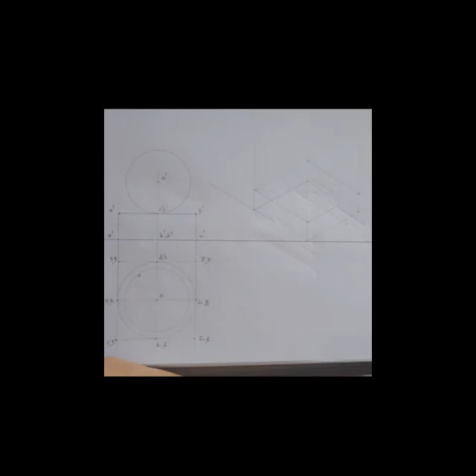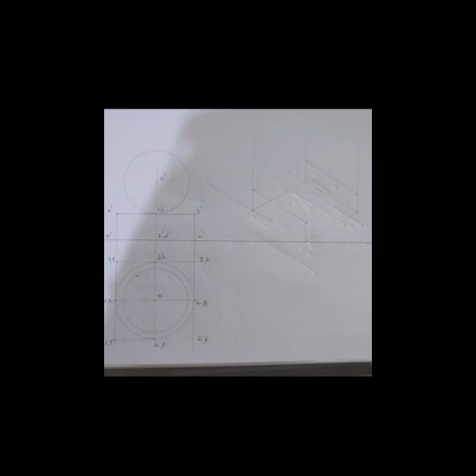Hi, in this session we will consider the second problem. Here we have a sphere of diameter 50 mm, and it is centrally placed over a cylindrical slab of 60 mm diameter and 20 mm height, and here we have to draw the isometric projection. That means we have to take isometric scale.

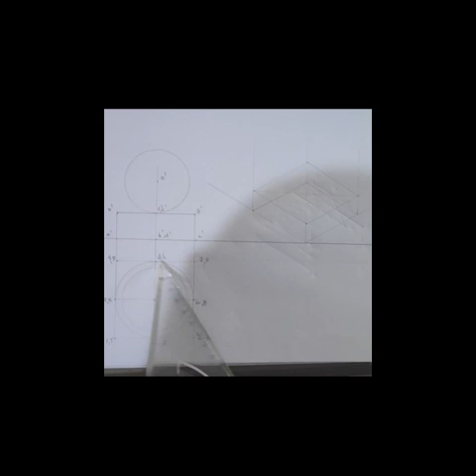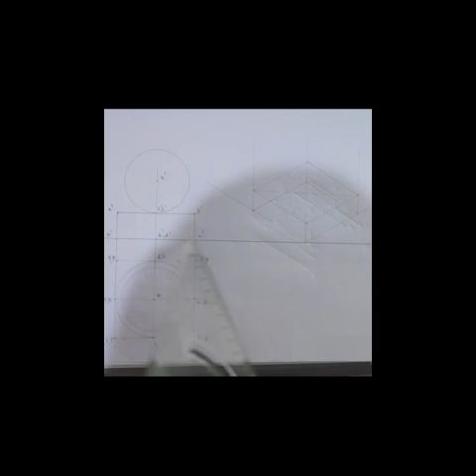First of all, you have to draw the simple plan and elevation. Here the bottom portion is cylindrical, so you have to draw the circular portion of the base, and that is A, B, C, D, and the top points are E, F, G and H. In this condition, we can consider only 4 equal divisions. Project upwards and obtain the corresponding view of the cylindrical base. This is A dash, B dash, C dash and D dash, E dash, F dash, G dash and H dash. That denotes

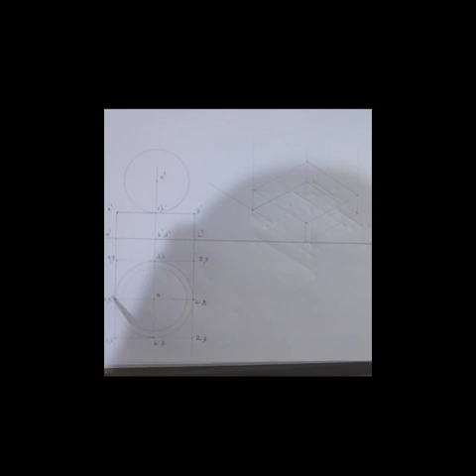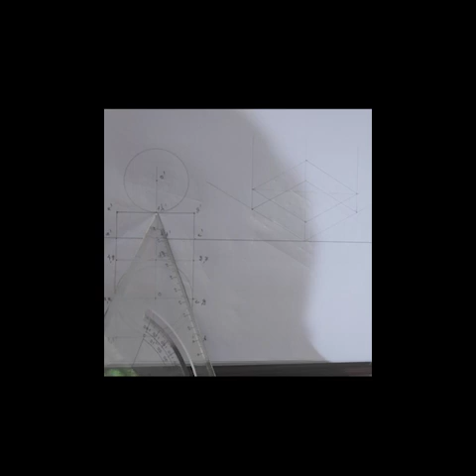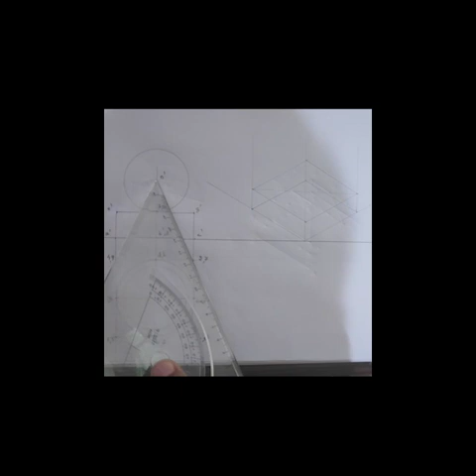the cylindrical slab. And the sphere is centrally placed over the slab. So for that you have to locate the center of the cylinder and draw a vertical projector. This line will intersect the top surface of the slab at this position, and take radius equal to 25 mm, because the diameter of the sphere is 50 mm. So this distance must be 25 mm, and mark the position of O dash, that is the center of the sphere. After that, draw a circle that will give the sphere.

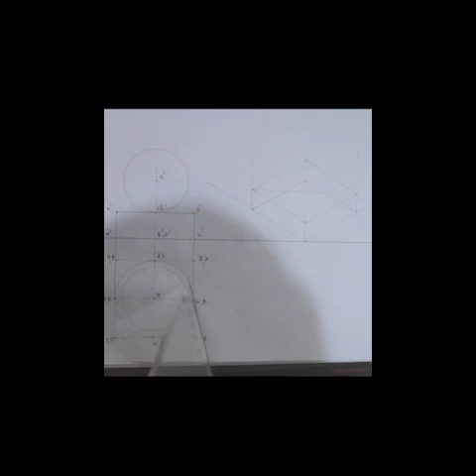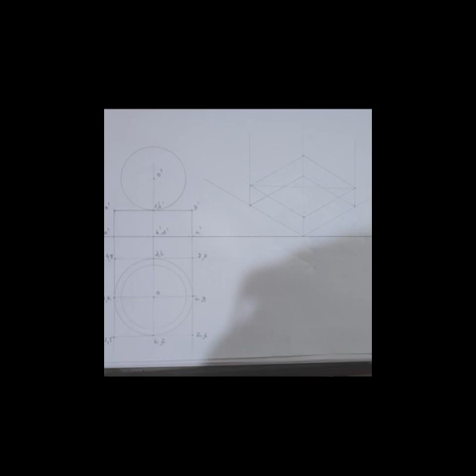After that, you can keep the same radius in your compass, and with O as center, you can draw the inner circle which denotes the periphery of the sphere. After that, you have to enclose the cylinder in a square cage, and that square cage is denoted as 1, 2, 3, 4 and 5, 6, 7 and 8. Then here you have to draw the isometric projection. You have to take isometric scale and we will mark point 1 here. Then from point 1 you will draw two 30-degree lines.

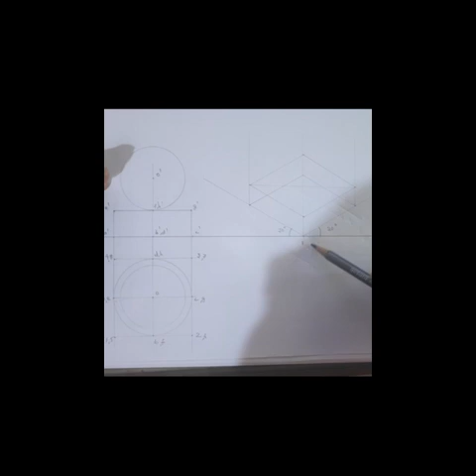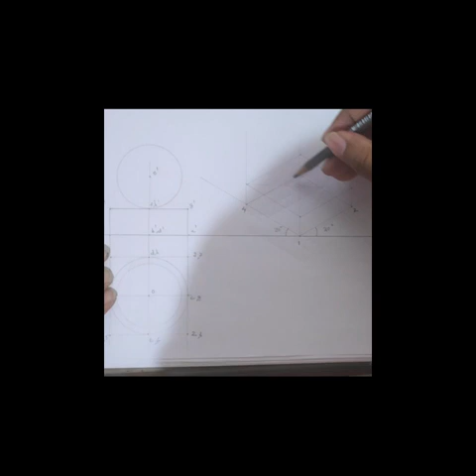And mark the isometric equivalent of 60 mm. 60 mm is the diameter. So 60 multiplied by 0.816 gives 49 mm. So 49 mm is marked on this line and on this line. And that points are point 1 and 2, and here we have point 4. Then draw another 30-degree line in the opposite direction and it will intersect here, and that is point 3.

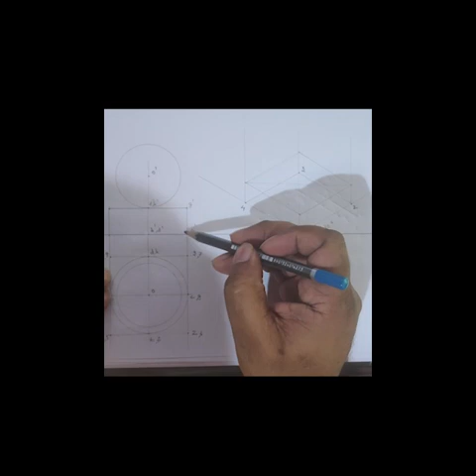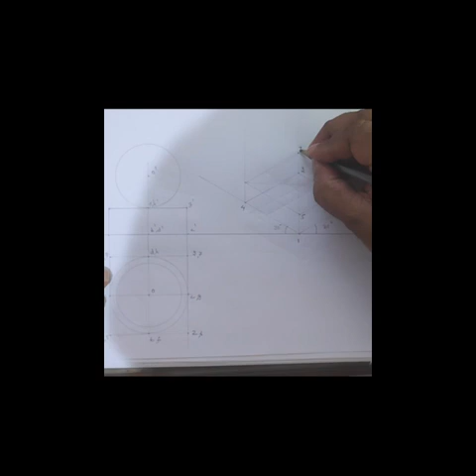After that, project upwards, projecting vertical lines from 1, 2, 3 and 4, and marking the isometric equivalent of this height. This is 20 mm. 20 multiplied by 0.816 gives around 16 mm. That 16 mm is marked on these vertical lines, so that you will get the position of point 5, 6, 7 and 8. So we have completed the isometric projection of the outer cage. Now we have to locate the inner points.

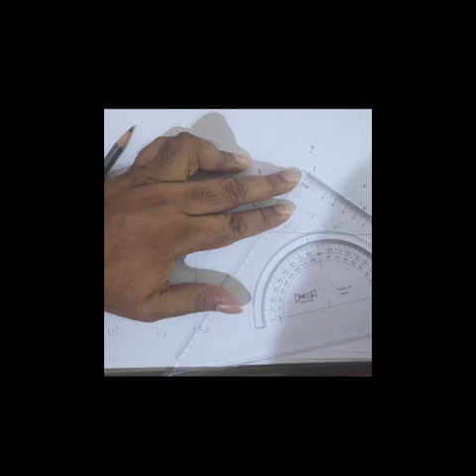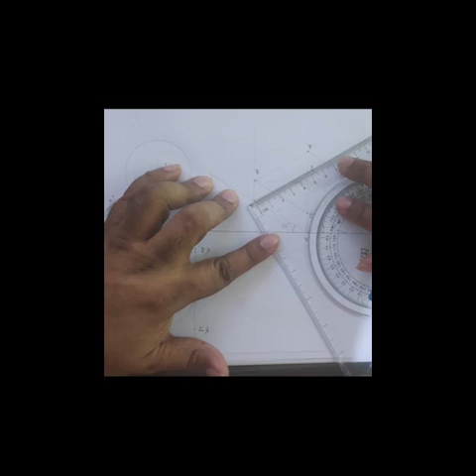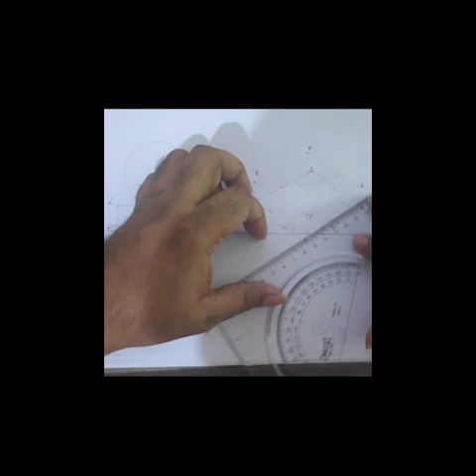For that, you have to mark the midpoint of these edges. The total length is 49 mm. So 49 divided by 2 gives 24.5 mm. So mark that distance as the midpoint. I have to mark the midpoint 24.5 this side. Another 24.5 here. Another 24.5 here.

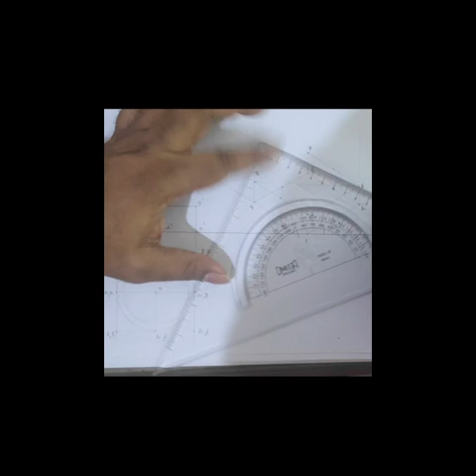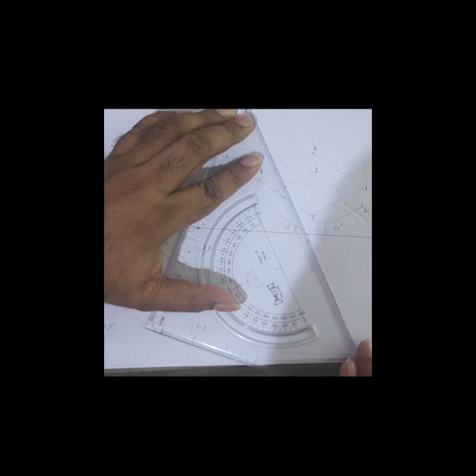Similarly, on the top surface, 24.5, 24.5, here and here. I have to mark one more. That's here. Then, after marking the midpoints, we will be connecting these points with the opposite corner. Connect this one. These lines must be thin lines.

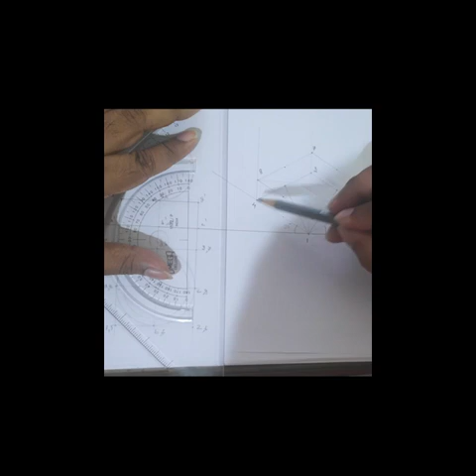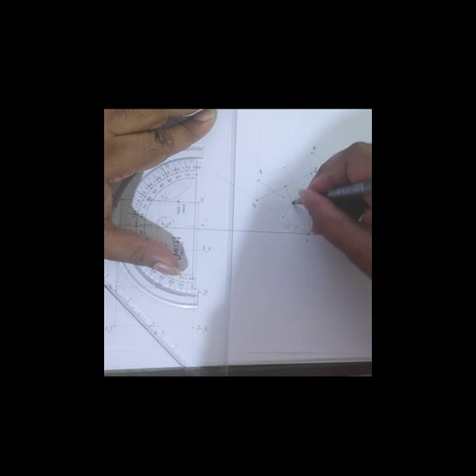First, we will consider the base points. Connecting 1 with the midpoint of line 3, 4 and 2, 3, so that we will get these two lines. Similarly, point 3 with the point located on 1, 4 and 1, 2, so that we will get an intersection here and here.

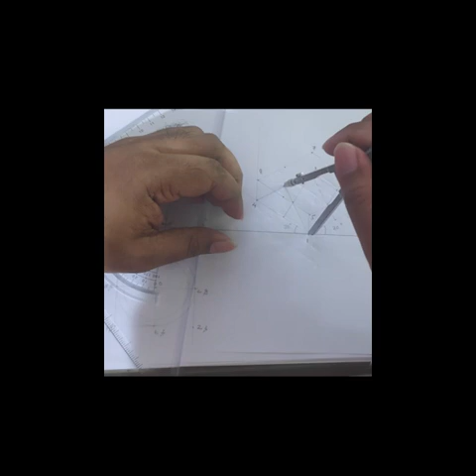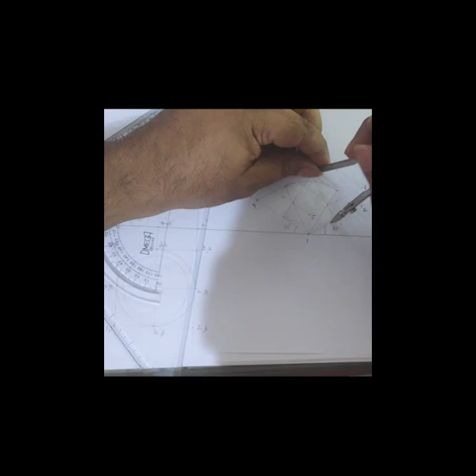Let us take the compass and with 1 as center and radius equal to this one, I'm drawing an arc up to this position. You can keep the same radius in your compass and you can draw another arc up to this point. So, we got two arcs.

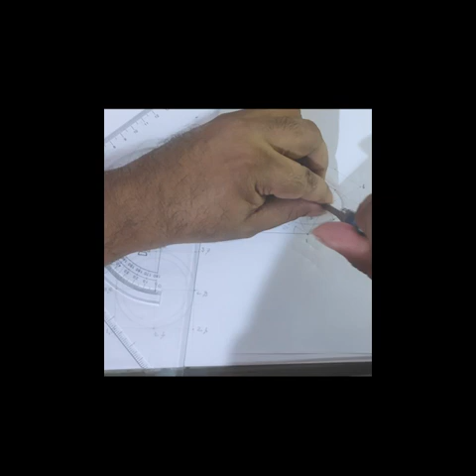Now, keep this radius in your compass and draw another arc. Keep this radius in your compass and complete that. So that we got the base portion of our cylindrical slab. We have to repeat the process in the top portion also.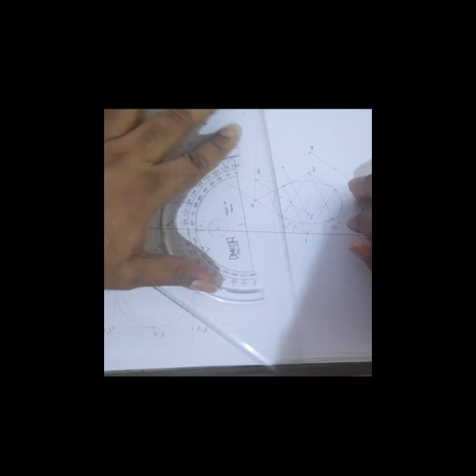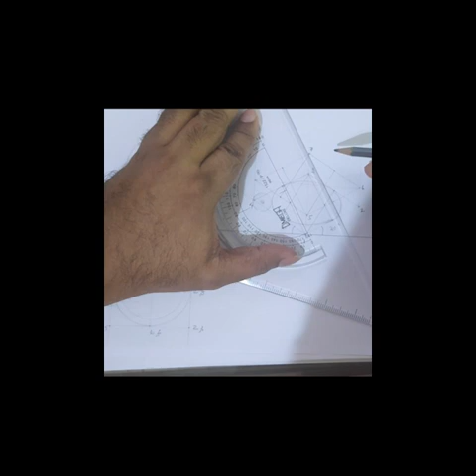We have to connect 5 and the midpoint of 7 and 8. 5 with the midpoint of 6 and 7. 7 with the midpoint of 5 and 8, that is here. 7 with the midpoint of 5 and 6. So that we will get the intersections here and here.

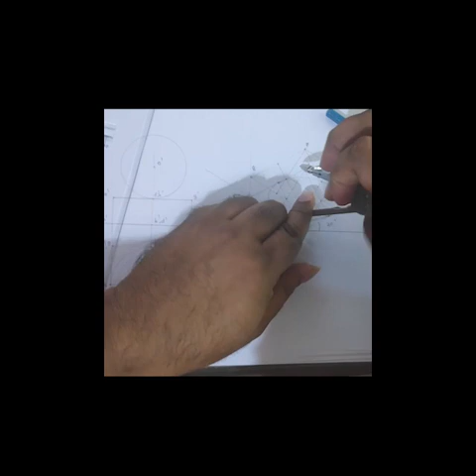Let us take the compass and take this radius in your compass. Let us draw an arc. The first arc, keeping the same radius with 7 as center, let us complete that.

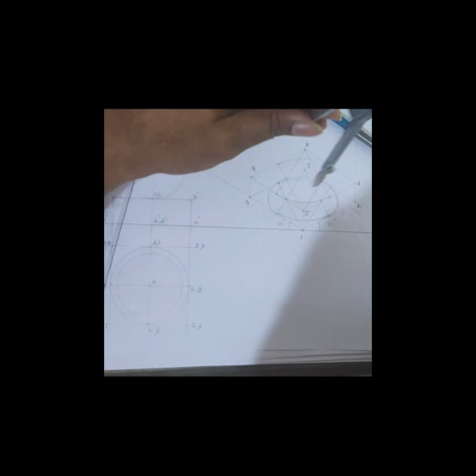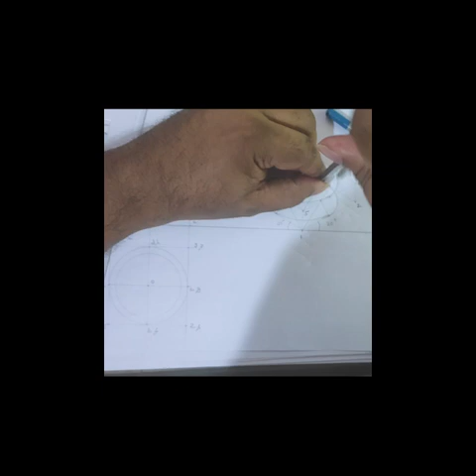This arc. And take this radius in your compass and draw another arc here and another arc here. And after that you have to draw a vertical line which is tangential to these two ellipses.

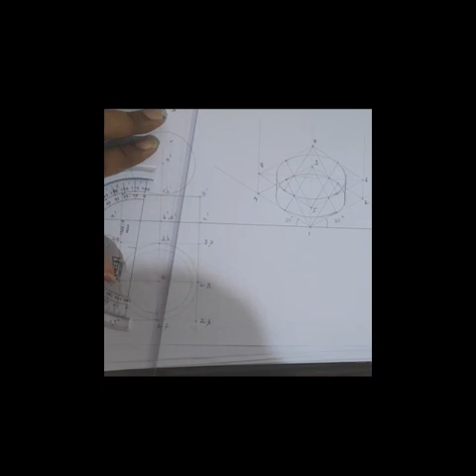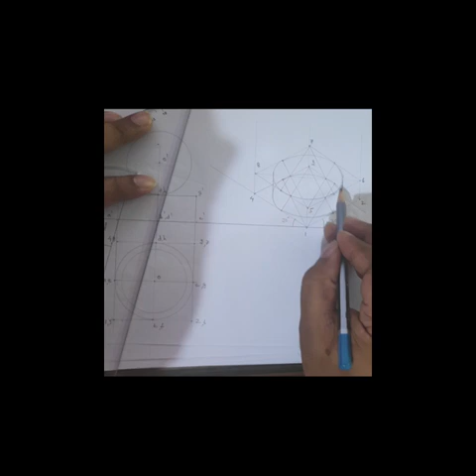Draw two vertical lines which are tangential to the ellipses that you have drawn. And this portion is the top surface and this portion is the base. This curved portion is hidden behind the object and that should be dotted. We will consider it later.

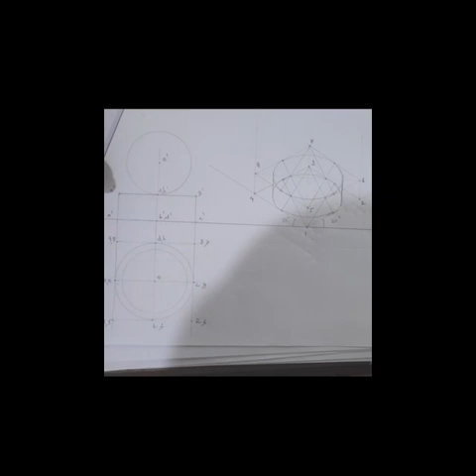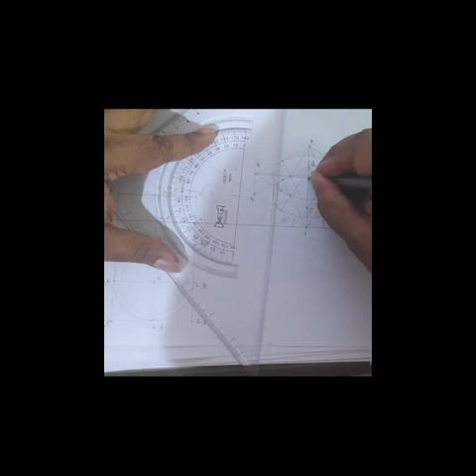Then after that we have to fix the sphere over the object. And for drawing that, first of all let us find the center of the cylinder, because the object is centrally placed. So we have to locate the center of the object. We will connect the diagonal and locate the center. So this is the center of the top surface.

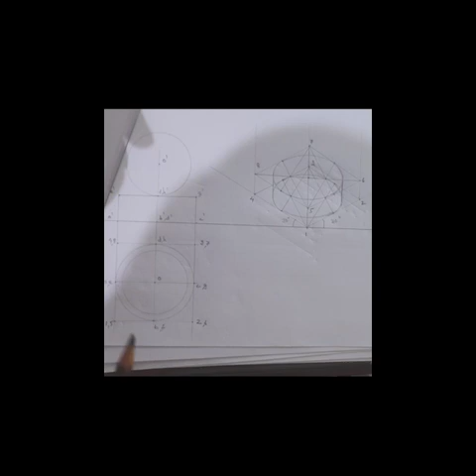For drawing the isometric projection of a sphere, you have to follow some specific steps. Here we have to draw the isometric projection of a sphere. First of all we have to locate the point of contact. This is the point of contact. After that you have to take the isometric equivalent of its radius.

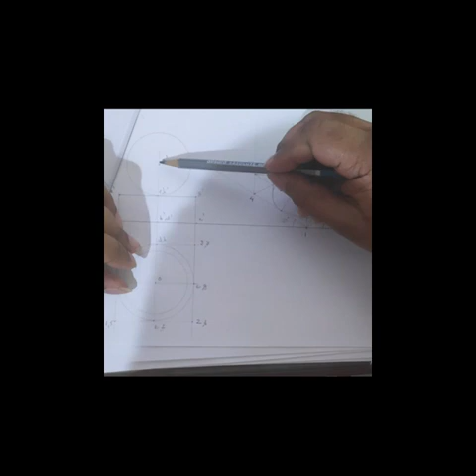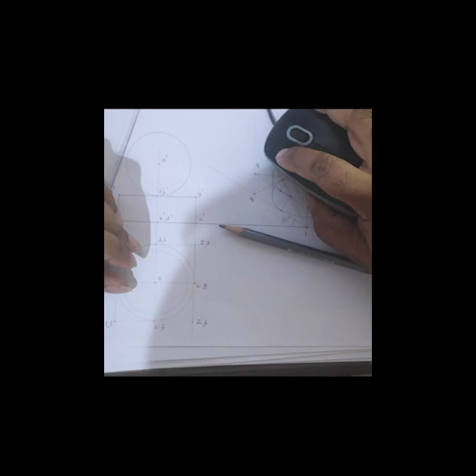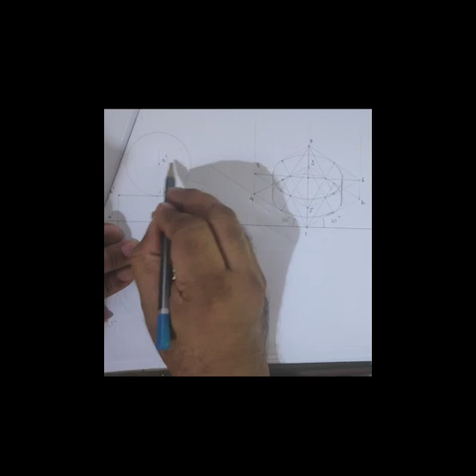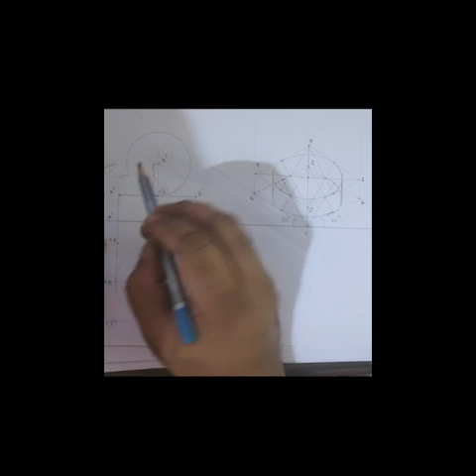The radius of this sphere is 25 mm. So 25 multiplied by 0.816 will give, let us calculate, 25 multiplied by 0.816 gives around 20.4, around 20.5 mm. The isometric equivalent of this radius is 20.5 mm. Actual radius is 25 mm. 25 multiplied by 0.816 gives approximately 20.5 mm.

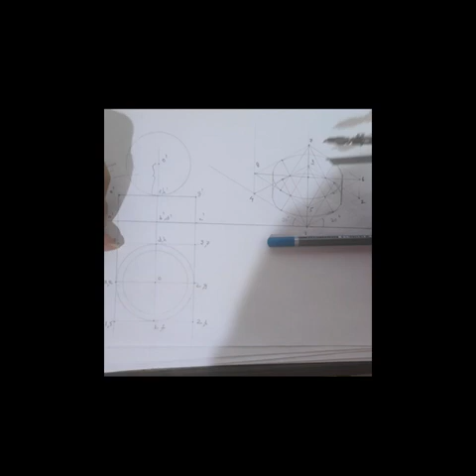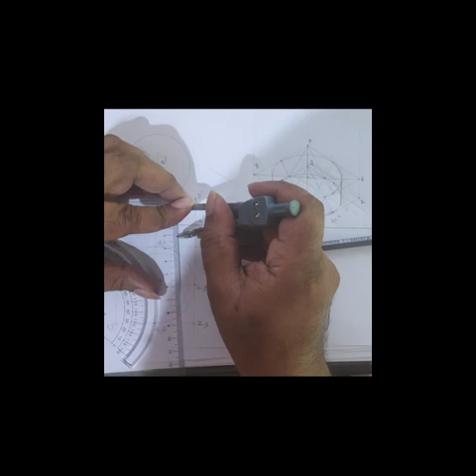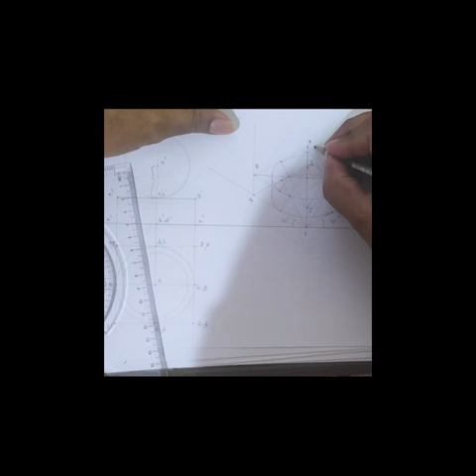Take that distance in your compass and we have to mark 20.5. Take 20.5 in your compass. And this is the point of contact or the center of the top surface. With 20.5 as radius, you are drawing an arc. And that will be the position of point O. That is the center of the sphere.

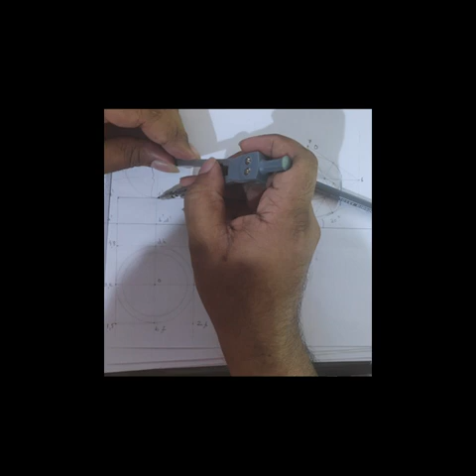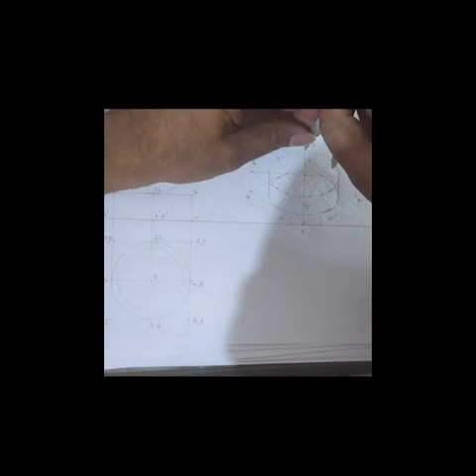And for drawing the outer surface of the sphere, you have to take the actual radius in your compass, that is 25 mm. The 25 mm is the actual radius, and you have to take that distance in your compass. Take 25 mm in your compass, and with this point as center, you have to draw a circle like this.

I have some complaint with my compass.

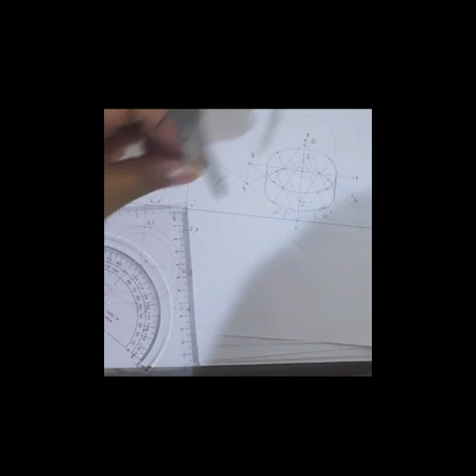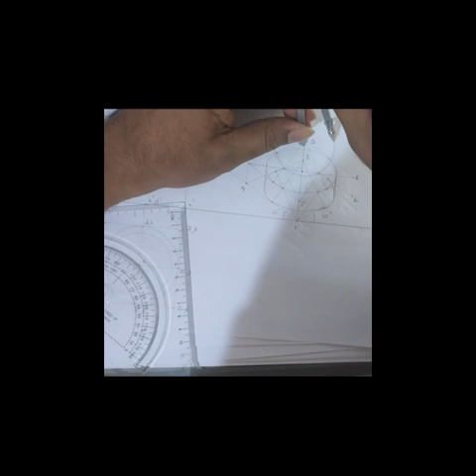So that you will get a circle like this, and that is the isometric view of this sphere, which is resting on the cylindrical object. So I am repeating the process. For drawing the isometric projection of a sphere, first of all we have to locate the point of contact. That means the center of the top cylinder.

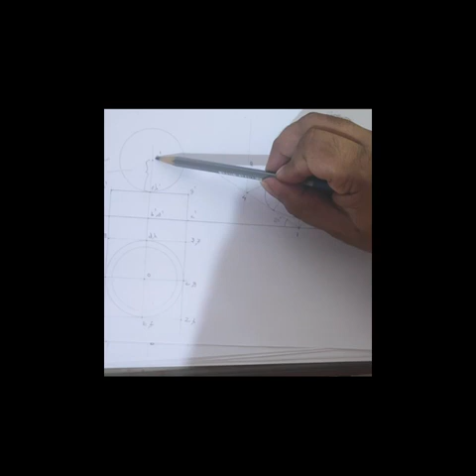This is the center. After that, you have to take the isometric equivalent of the radius. The isometric equivalent is 25 multiplied by 0.816, which gives around 20.5 mm. Take that distance, 20.5 mm, in your compass and mark this distance. That is the isometric equivalent of the radius, and that is the center of the sphere.

After locating the center, take the actual radius. Very important. The actual radius is 25 mm. Take 25 mm in your compass and draw a circle, and that is the outer profile of the sphere. Those are the steps that you have to follow for drawing the isometric projection of a sphere.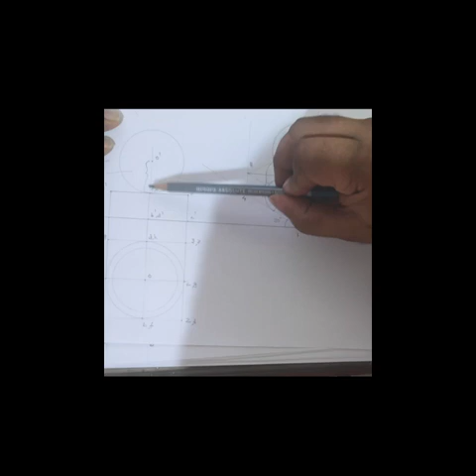Now suppose that it is isometric view. If it is isometric view, then for marking the center of the sphere, the position of point O, you have to take the actual radius. So mark 25 mm, and that is the center.

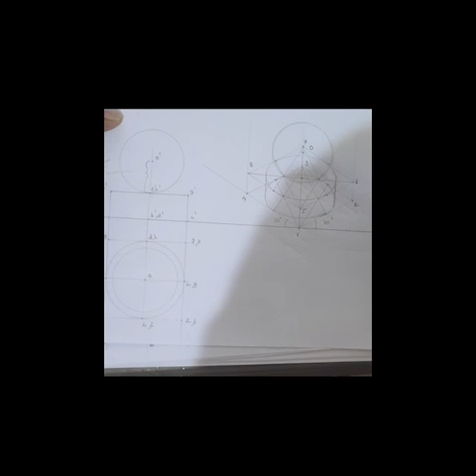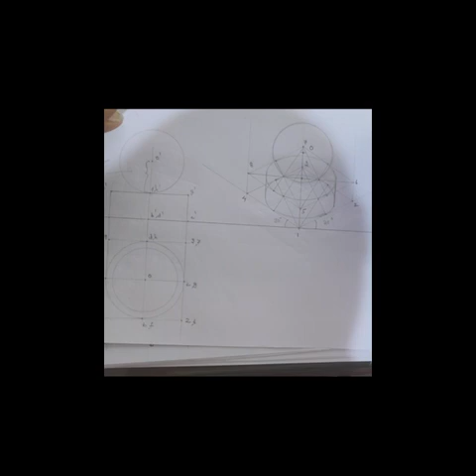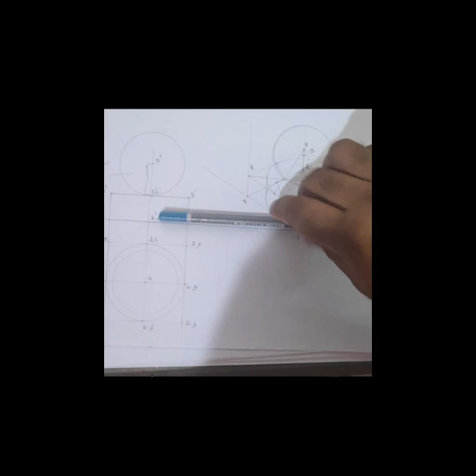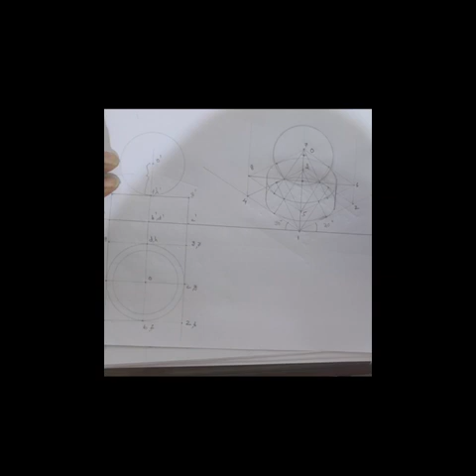After that, for the outer profile, you have to take this radius, capital R, which is 25 divided by 0.816. That will give 30.6. So, for drawing isometric view, mark the actual radius and locate the center. Then, for drawing the circle, take radius equal to 25 divided by 0.816, around 30.6, and with O as center, draw that circle.

And that is very important. In case of isometric projection, for the center use the scaled radius, and the profile radius is the actual radius.

For isometric view, for marking the center, you have to mark the actual radius, and for drawing the profile, the radius is equal to the actual radius divided by the isometric scale, that is 0.816. That will give the profile radius. In isometric view, the profile radius will be greater than the actual radius.

These are the steps that you have to follow while drawing the isometric view and isometric projection of a sphere. That is very important. We will consider the isometric view of a hemisphere in the next class. Thank you.